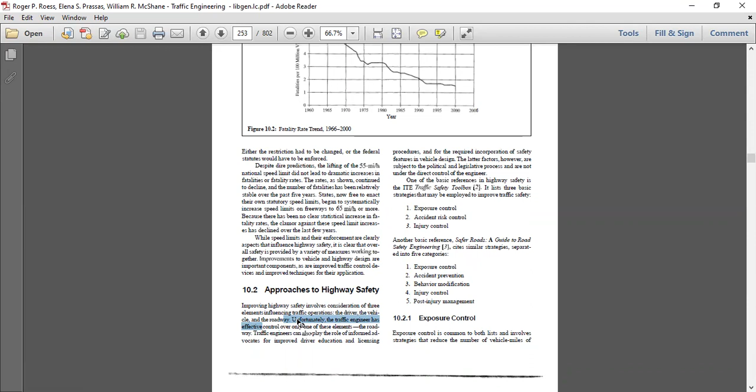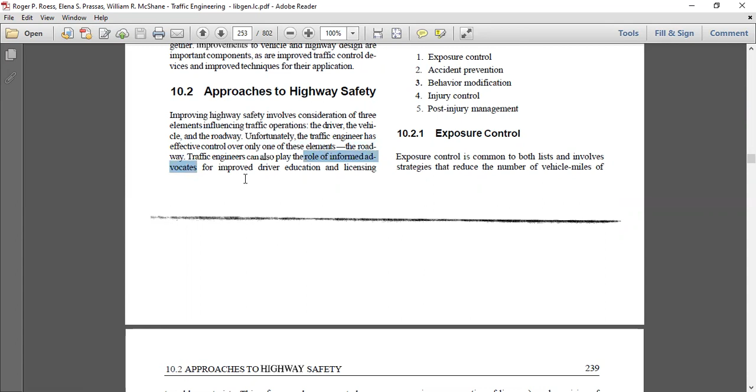Unfortunately, the traffic engineer has effective control over only one of these elements, the roadway. The traffic engineer can also play the role of informed advocate for improved driver education and licensing procedures, and for the required incorporation of safety features in vehicle design. The latter factors, however, are subject to the political and legislative process and are not under the direct control of the engineer.

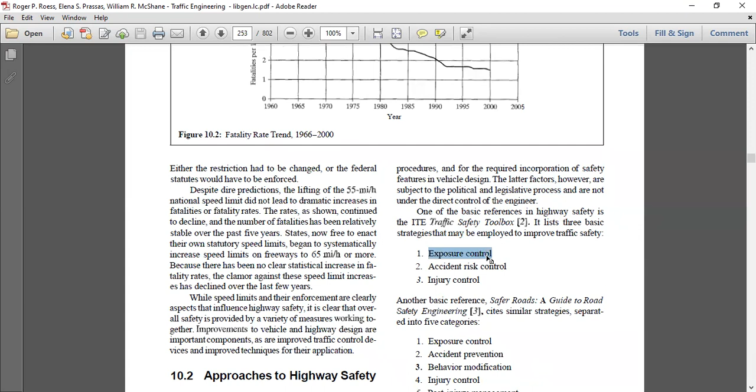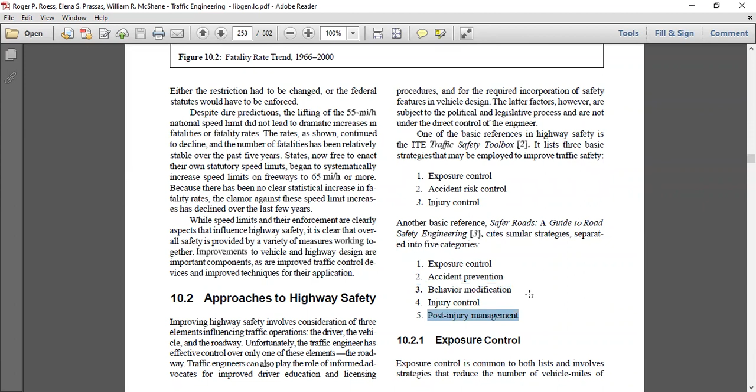One of the basic references in highway safety, the ITE Traffic Safety Toolbox, it lists three basic strategies may be employed to improve traffic safety. The first is exposure control, the second is accident risk control, and the third is injury control. Another basic reference cites similar strategies separated into five categories: first is exposure control, second is accident prevention, third is behavior modification, fourth is injury control, and fifth is post-injury management.

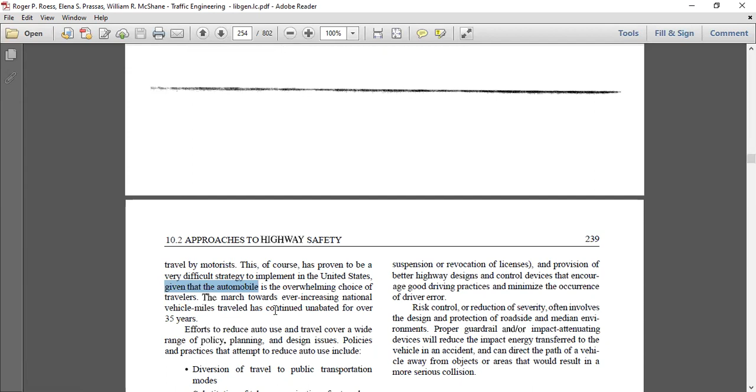The first is exposure control. Exposure control involves strategies that reduce the number of vehicle miles of travel by motorists. This, of course, has proven to be a very difficult strategy to implement in the United States, given that the automobile is the overwhelming choice of travelers. The march toward ever increasing national vehicle miles traveled has continued unabated for over 35 years.

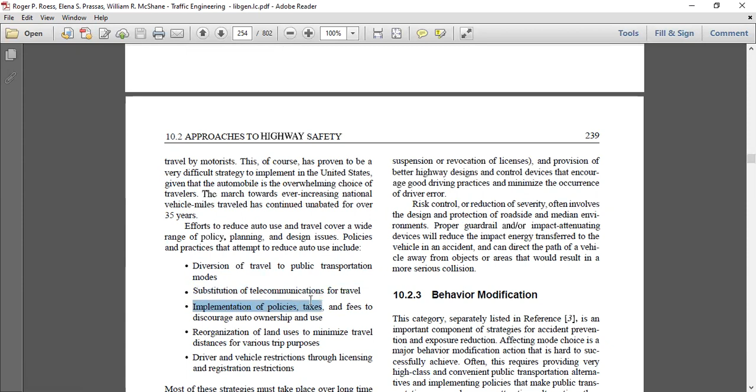Efforts to reduce auto use and travel cover a wide range of policy, planning and design issues. Policies and practices that attempt to reduce auto use include diversion of travel to public transportation modes, substitution of telecommunication for travel, implementation of policies, taxes, and fees to discourage auto ownership and use, reorganization of land use to minimize travel distance for various trip purposes, and driver and vehicle restriction through licensing and registration restrictions.

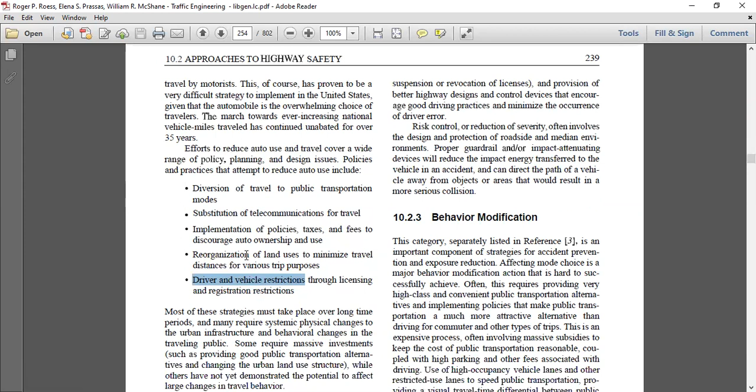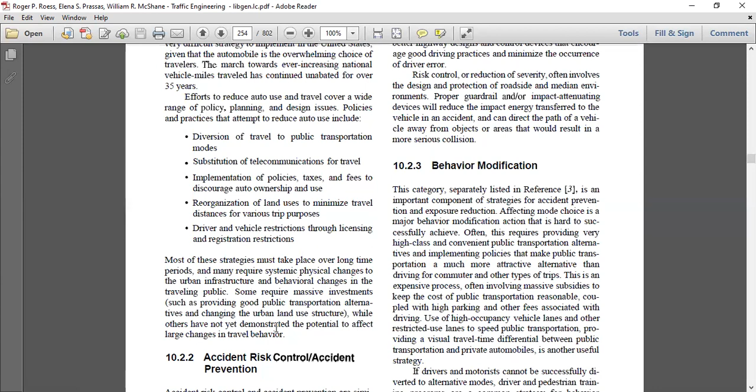Most of these strategies must take place over a long time period and many require systemic physical changes to the urban infrastructure and behavioral changes in the traveling public. Some require massive investment, while others have not yet demonstrated the potential to affect large change in travel behavior.

So, accident risk control and accident prevention. Accident risk control and accident prevention are similar terms with a number of common features. They are not, however, the same. Accident prevention implies actions that reduce the number of accidents that occur for a given demand level. Accident risk control incorporates this, but also includes measures that reduce the severity of an accident when it occurs. Reduction of accident severity overlaps accident risk control and injury control strategies.

Accident prevention involves a number of policy measures, including driver and pedestrian training, removal of drivers with bad driving records, and the provision of better highway designs and control devices that encourage good driving practice and minimize the occurrence of driver error. Risk control or reduction of severity often involves the design and protection of the roadside and median environment.

Proper guardrail or impact attenuating devices will reduce the impact energy transfer to the vehicle in an accident and can direct the path of a vehicle away from objects or areas that would result in a more serious collision.

The next is behavior modification. This category is separately listed in the reference and is an important component of a strategy for accident prevention and exposure reduction. Affecting mode choice is a major behavior modification action that is hard to successfully achieve. Often this requires providing very high class and convenient public transportation alternatives and implementing policies that make public transportation a much more attractive alternative than driving for commuter and other types of trips.

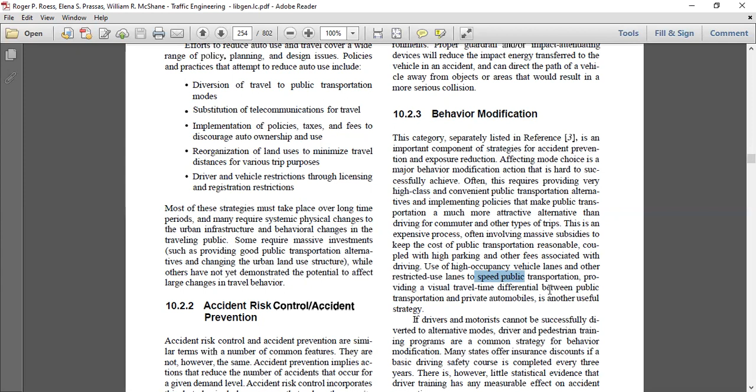This is an expensive process, often involving massive subsidies to keep the cost of public transportation reasonable, coupled with high parking and other fees associated with driving. Use of high occupancy vehicle lanes and other restricted use lanes to speed public transportation, providing a visual travel time differential between public transportation and private automobiles, is another useful strategy.

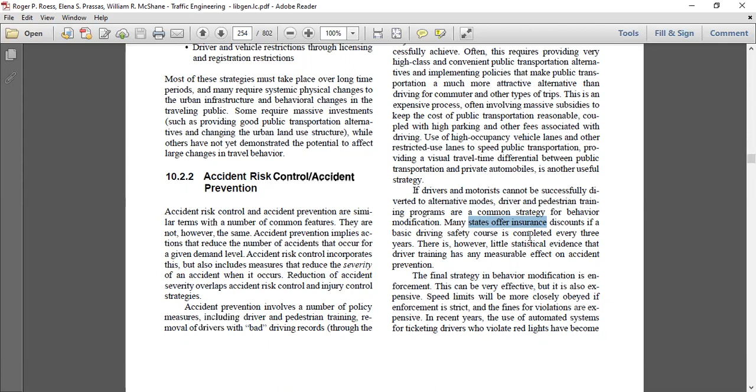If drivers and motorists cannot be successfully diverted to alternative modes, driver and pedestrian training programs are a common strategy for behavior modification. Many states offer insurance discounts if a basic driving safety course is completed every 3 years. There is, however, little statistical evidence that driver training has any measurable effect on accident prevention.

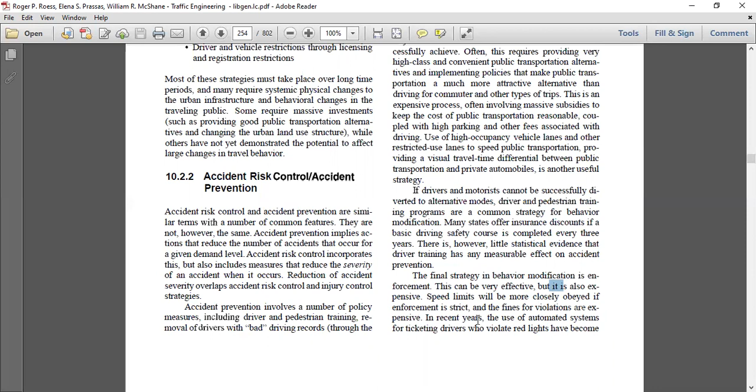The final strategy in behavior modification is enforcement. This can be very effective, but it is also expensive. Speed limits will be more closely obeyed if enforcement is strict and the fines for violations are expensive. In recent years, the use of automated systems for ticketing drivers who violate red lights has become quite popular. Automated speed enforcement is also possible with current technologies.

The issues involved in automated enforcement are more legal than technical at present. While the license plate of a vehicle running a red light can be automatically recorded, it does not prove who is driving the vehicle. In most states, automated ticketing results in a fine but does not include points on the owner's license, since it could not be proved that the owner was the driver at the time of the violation.

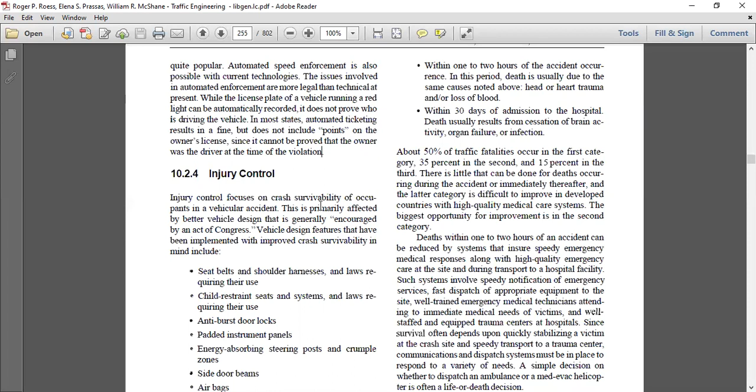The next is injury control. Injury control focuses on the survivability of occupants in vehicular accidents. This is primarily affected by better vehicle design that is generally encouraged by acts of Congress. Vehicle design features that have been implemented with improved crash survivability in mind include seat belts and shoulder harnesses and the laws requiring their use, child restraint seats and systems and the laws requiring their use, anti-burst door locks, padded instrument panels, energy absorbing steering posts and crumple zones, side door beams, airbags, headrests and restraints, shatterproof glass, and forgiving interior fittings.

Post-injury management, while included as part of injury control in the reference, is related to a separate category. Traffic fatalities tend to occur during three critical time periods. During the accident occurrence or within minutes of it, death is usually related to head or heart trauma or extreme loss of blood. Within 1 or 2 hours of the accident occurrence, death is usually due to the same causes noted above: head or heart trauma or loss of blood. Within 30 days of admission to the hospital, death usually results from cessation of brain activity, organ failure, or infection.

About 50% of traffic fatalities occur in the first category, 35% in the second, and 15% in the third. There is little that can be done for deaths occurring during the accident or immediately thereafter. And the latter category is difficult to improve in developed countries with a high quality medical care system. The biggest opportunity for improvement is in the second category. Deaths within 1 to 2 hours of an accident can be reduced by systems that ensure speedy emergency medical responses along with high quality emergency care at the site and during transport to a hospital facility.